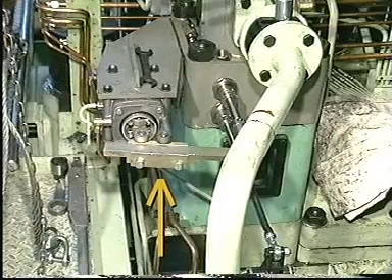The variable injection timing system comprises VIT actuators located on the fuel pumps and pneumatic components located on the control console at the side of the engine.

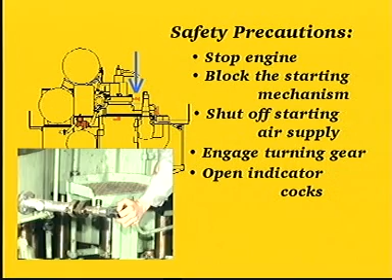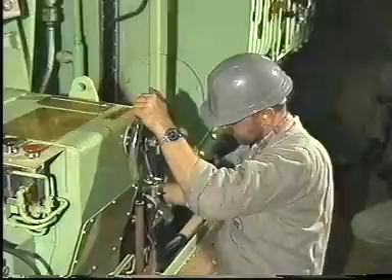Supply 7 bar control air pressure to the pneumatic components on the engine side console. Switch control from the engine room to the engine side console. Turn the regulating hand wheel until the tapered slots of the two levers are aligned.

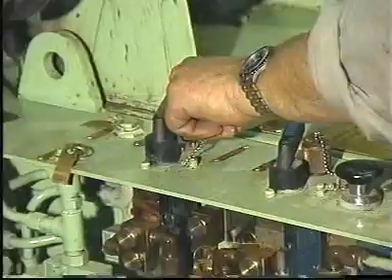The throttle non-return valve must be fully open before adjusting the VIT system. Loosen the lock nut and screw the spindle counterclockwise as far as it will go.

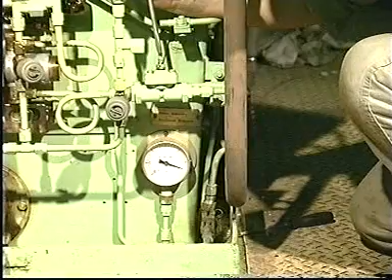Make sure that the pressurized air reaches the VIT actuator. It may be necessary to switch the changeover valve manually. The pilot valve must be adjusted so that when the spindle is pressed 8 mm inwards, the control air pressure will be 5.5 bar.

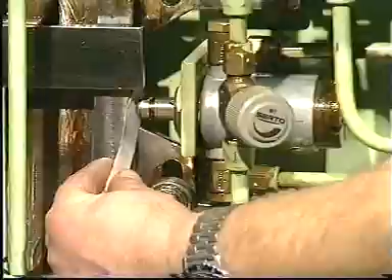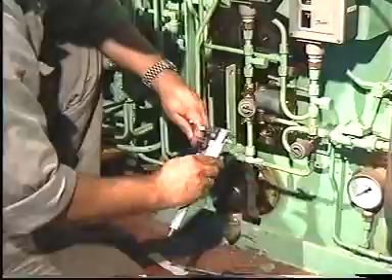Turn the regulating hand wheel so that the steel bar just touches the pilot valve. Insert a distance piece with a thickness of precisely 8 mm. If the control air pressure deviates from 5.5 bar, loosen the lock screw and turn the spring retainer cap of

the pilot valve until the pressure, which can be read on the pressure gauge on the engine side control console, reads 5.5 bar.

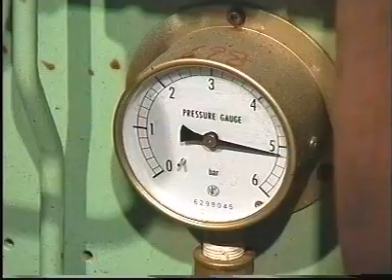Note that it will not be possible to obtain the correct pressure if the throttle non-return valve is not fully open.

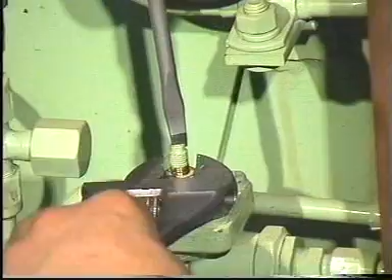Screw the spindle clockwise until a pressure drop can just be registered. Screw the spindle counterclockwise 1 revolution and lock it in this position with a lock nut. This position prevents a sudden increase in VIT index and thereby a sudden increase in the maximum combustion pressure.

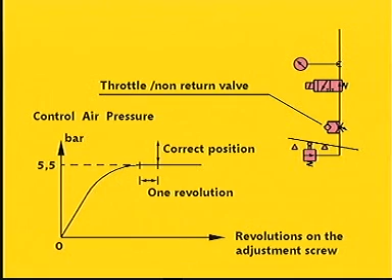Make sure that the VIT index is set at 0. Measure distance R between the two pivoting points. Note down the result.

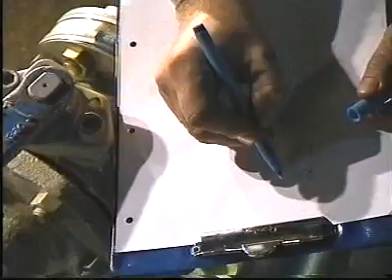Measure distance L between the pivoting point and the center line of the VIT rack. Note down the result.

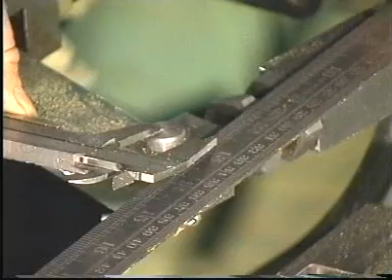In the event that R does not equal L plus X, displace the lever until new measurements confirm that R equals L plus X.

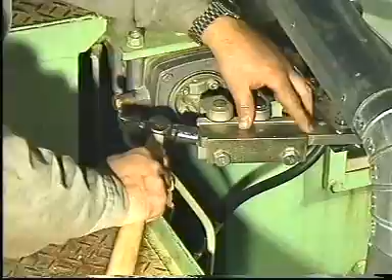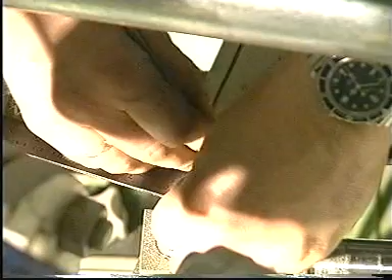When the correct position is obtained, mark the position of the lever and stamp the cylinder number on the locking plate and lever.

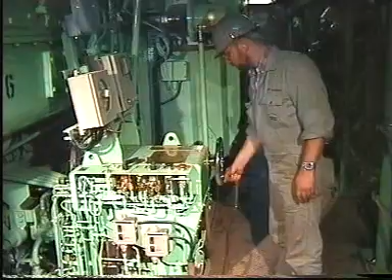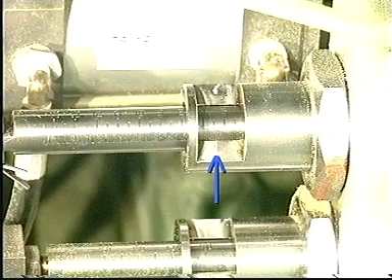Turn the regulating hand wheel until the pressure on the pressure gauge reads 2.75 bar. The VIT rack must be adjusted so that the middle index of the VIT rack can be read when a control air pressure of 2.75 bar is applied. If the actual VIT index does not correspond to the middle index, adjust the link until it does.

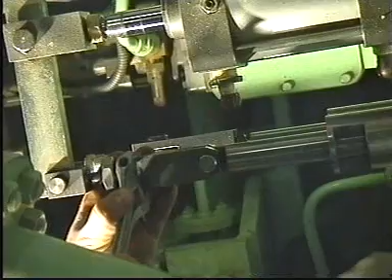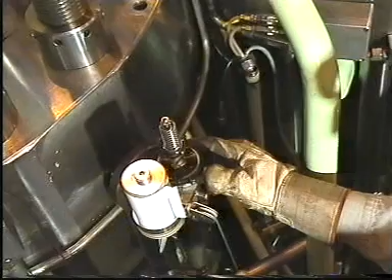Start the engine and run it up to a load corresponding to the breakpoint load. Use the indicator drive or PMI system to adjust the load until it corresponds to the breakpoint load. The mean indicated pressures of the individual cylinders must not deviate more than 0.5 bar.

If the deviation is more than 0.5 bar, adjust the load distribution on the fuel index rack of the individual cylinders. The engine is now running at the breakpoint.

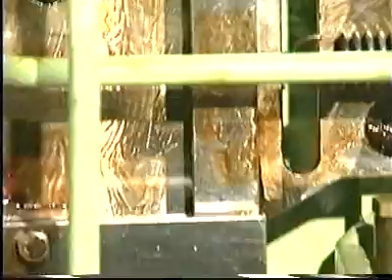At this load, the steel rod must touch both pivoting points. If the rod does not touch both pivoting points, adjust the rod in accordance with step 2.3 of this film.

Measure the maximum combustion pressures of each cylinder. Adjust the links or disconnect and lock the VIT racks so that the maximum combustion pressures, corrected to ISO ambient conditions, are uniform and have the required values.

Note down the fuel pump indexes and VIT indexes.

Run the engine up until it corresponds to 100% MCR. Use the indicator drive or PMI system to adjust the load so that it corresponds to 100% MCR. The mean indicated pressures of the individual cylinders must not deviate more than 0.5 bar.

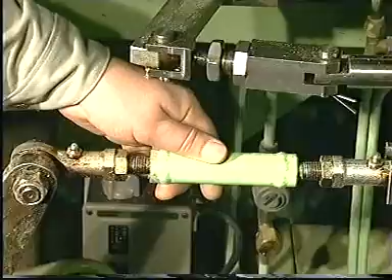If the deviation is more than 0.5 bar, adjust the load distribution on the fuel index rack of the individual cylinders.

Again, measure the maximum combustion pressures for each cylinder. Adjust the links or displace and lock the VIT racks so that the maximum combustion pressures, corrected to ISO ambient conditions, are uniform and have the required values.

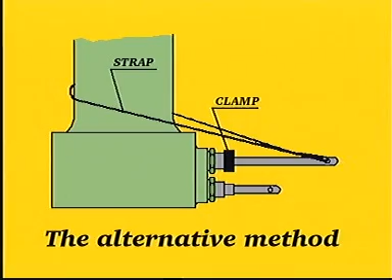Note down the fuel pump and VIT indexes.

Note down the VIT indexes at breakpoint and 100% MCR and calculate the average index. Determine the middle value of the VIT rack and calculate the difference between the middle index and the calculated average index. The result of this calculation will determine how much the cams are to be turned.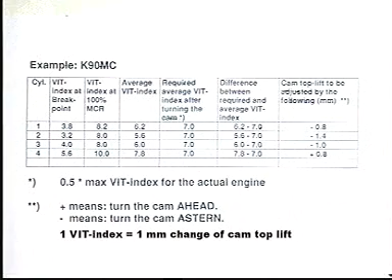If the result exceeds 0.5 millimeters, the cams must be turned according to step 1.6 of this film, after step 1.5 has been completed. The purpose of turning the cams is to distribute the breakpoint and 100% MCR service points evenly around the middle value of the VIT rack.

Note down the VIT indexes at breakpoint and at 100% MCR and calculate the difference. Add half of this difference to the middle value of the VIT rack. Subtract half of this difference from the middle value of the VIT rack.

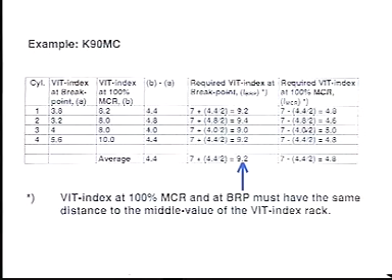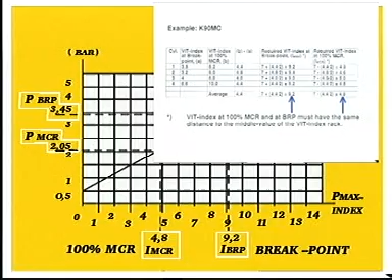Calculate the average VIT index at breakpoint and at 100% MCR. Determine the control air pressures corresponding to the average VIT index at breakpoint and at 100% MCR.

Stop the engine before making any adjustments. Make sure that control air is able to pass the changeover valve.

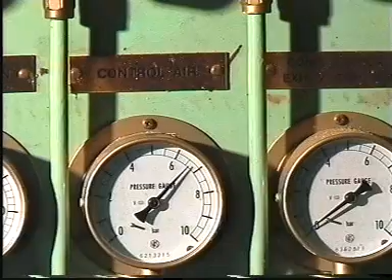Supply a control air pressure of 7 bar to the pilot valve. If the links were adjusted in step 1.4, then adjust again so that a control air pressure of 2.75 bar corresponds to the middle value of the VIT rack.

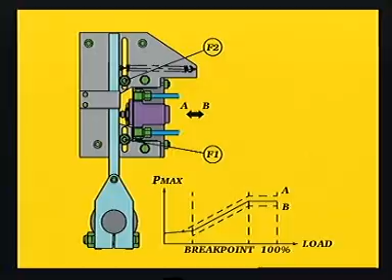Turn the fuel regulating handle to the breakpoint position. At this position, the steel rod touches both pivoting points. Displace the pilot valve bracket until the calculated control air pressure at breakpoint is obtained.

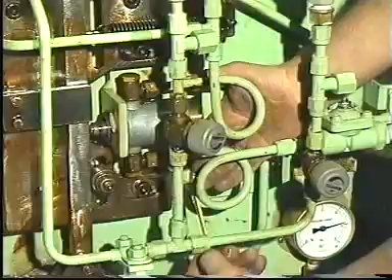Turn the fuel regulating handle to the 100% MCR position. Displace the lowermost pivoting point until the calculated control air pressure at 100% MCR is obtained.

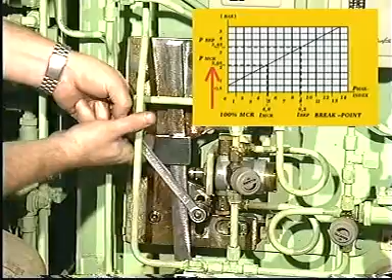Start the engine and run it up to a load corresponding to the breakpoint. Make sure that the control air pressure is able to pass the changeover valve.

Fine adjust the links so that the maximum combustion pressures, corrected to ISO ambient conditions, are uniform and have the required value. Load the engine until it corresponds to 100% MCR and fine adjust the lowermost pivoting point so that the maximum combustion pressures, corrected to ISO ambient conditions, are uniform and have the required values.

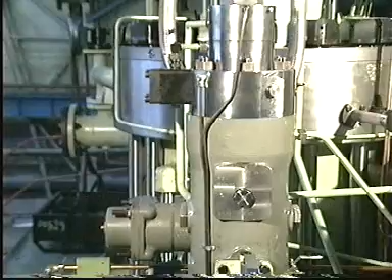Cams must be turned if the value calculated in step 1.4 of this film is exceeded.

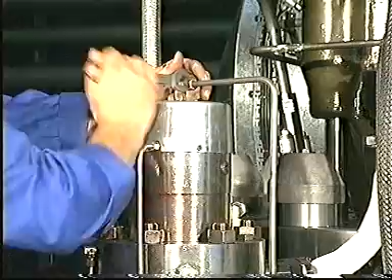The actual fuel pump lead must be determined before turning the cams. Make sure that the reversing links are in the ahead position. Disconnect the air pipe and remove the cover from the puncture valve.

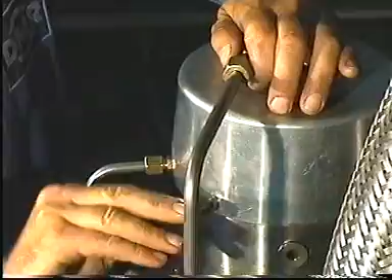Remove the plug screws to provide access for the measuring tool. Remove the puncture valve.

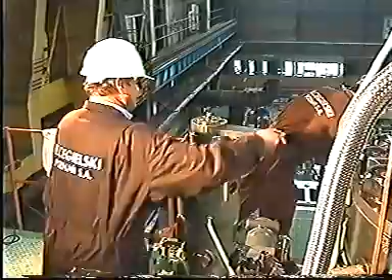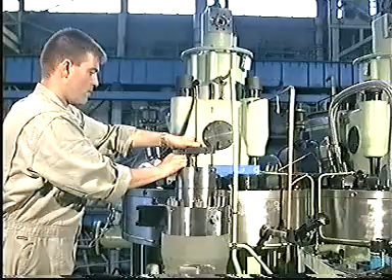Mount the measuring tool, making sure that it engages correctly with the bore in the top of the fuel pump plunger. Turn the cylinder concerned to top dead center.

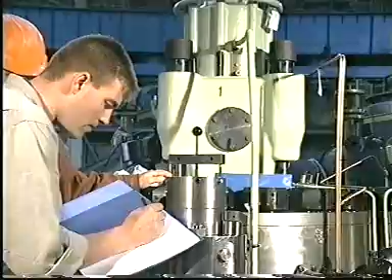Read the actual fuel pump lead directly on the measuring tool. Read the VIT index. If the VIT index is not at 0, the lead must be corrected before it is recorded in the engine logbook.

Carry out fine adjustments through the small cover. If the camshaft has been dismantled or if new cams have been mounted, adjust the cams before mounting the lower part of the camshaft housing.

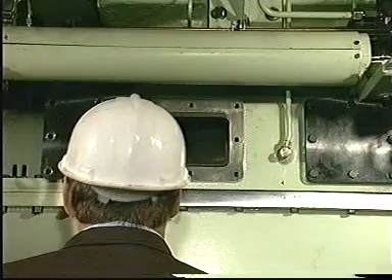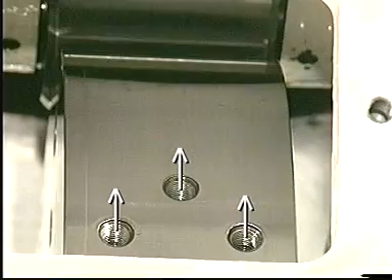Remove the plugs from the cam and insert copper gaskets. Mount, but do not tighten the snap-on couplings.

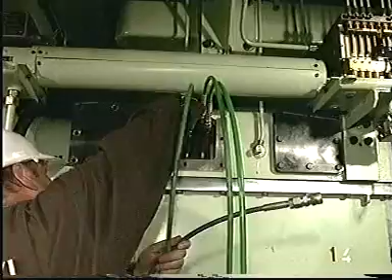Connect the snap-on couplings to the high-pressure pump and vent the system. When oil without air bubbles flows from the couplings, fully tighten the couplings.

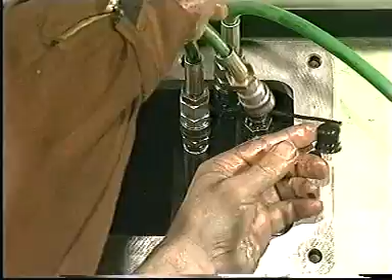Turn the engine until the special spanner can be mounted, then raise the pressure until oil seeps out between the cam and camshaft.

Read the measuring tool once again before turning the cam. Turn the cam in the required direction. See also step 1.4 of this film.

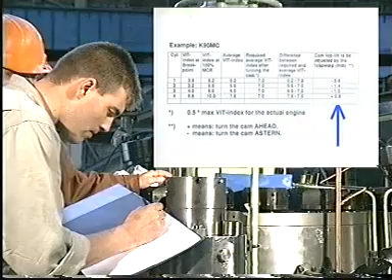Follow the turning of the cam on the measuring tool and stop turning when the required change has been obtained. Relieve the system of pressure and remove the spanner and hydraulic tools.

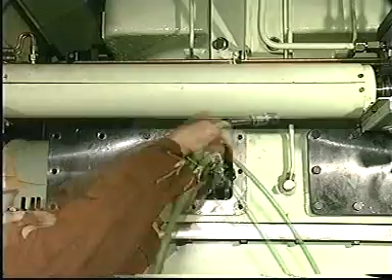Leave the cams to settle for a minimum of 15 minutes and then mount the plugs. Turn the cylinder concerned to top dead center and read the new fuel pump lead.

Read the VIT index. If the VIT index is not at 0, the lead must be corrected before it is recorded in the engine logbook. Mount the cover of the camshaft housing.

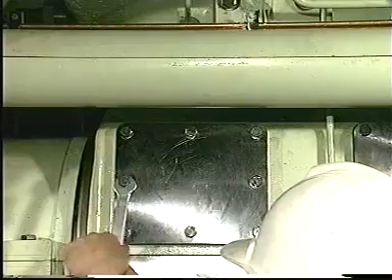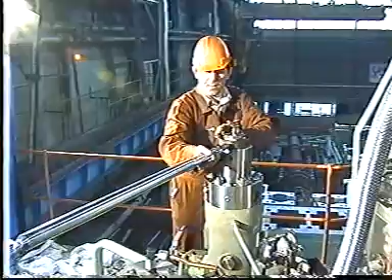Provide the puncture valve with new sealing rings and lubricate with molybdenum disulfide. Tighten the puncture valve to the torque stated in the instruction book, Volume 2, Chapter 909, and mount the plug.

Screws, cover and control air pipe. Finally, change over to normal engine control. Make sure that the VIT-system changeover valve is properly connected.

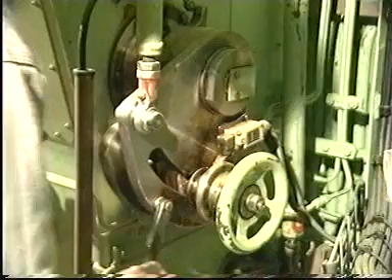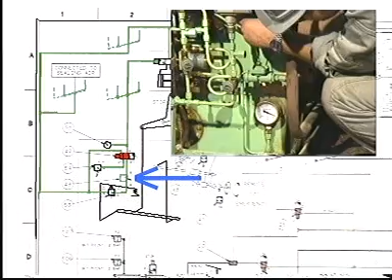The system will have to be adjusted when certain components are replaced. Regarding the throttle non-return valve, see Part 1, Step 1.1 of this film. Regarding the pilot valve, see Part 1, Step 1.1 of this film. Regarding the VIT actuators, see Part 1, Step 1.2 of this film.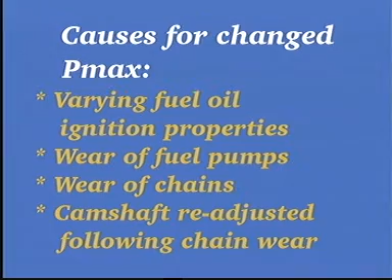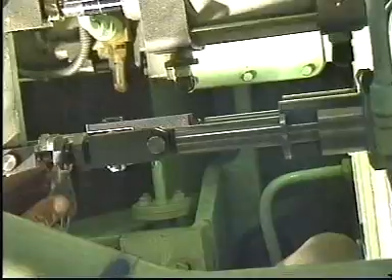Measure the maximum combustion pressures regularly, especially after bunkering new fuel oil. Adjust the individual links until the maximum combustion pressures, corrected to ISO ambient conditions, are uniform and have the required value.

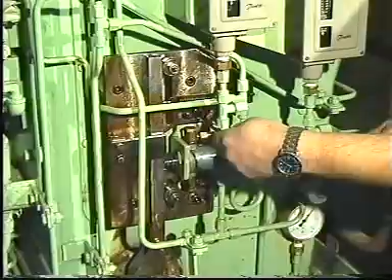If all the maximum combustion pressures are either too high or too low, displace the pilot valve bracket.

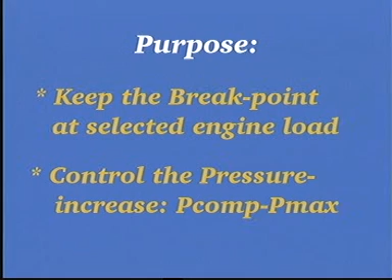The purpose of this adjustment is to keep the breakpoint at the selected engine load and to control the pressure increase. An excessive pressure increase may lead to a poor cylinder condition. In this event, contact the engine builder before making any adjustment.

Start the engine and run it up to a load corresponding to the breakpoint load, and hereafter to 100% MCR load. Use the indicator drive or PMI system to adjust the load so that it corresponds to the breakpoint load and 100% MCR load. Note down the fuel pump indexes.

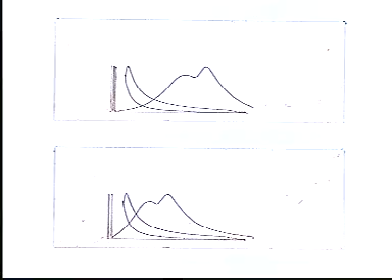The mean indicated pressure of the individual cylinders must not deviate more than 0.5 bar. If the deviation is larger than 0.5 bar, adjust the load distribution on the fuel index rack of the individual cylinders.

Switch from engine room control to control from the engine side console. Turn the fuel regulating hand wheel corresponding to the determined fuel pump index at breakpoint.

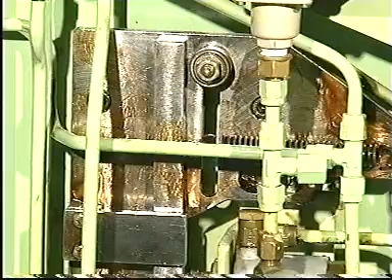If the steel rod does not touch both pivoting points, loosen it from the shaft and turn it to the correct position.

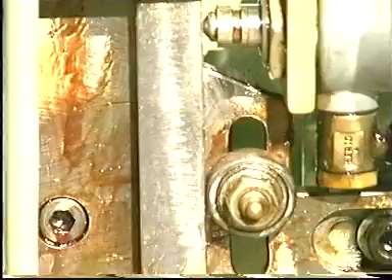Start the engine and run it up to a load corresponding to the breakpoint load. Make sure that the steel rod touches both pivoting points.

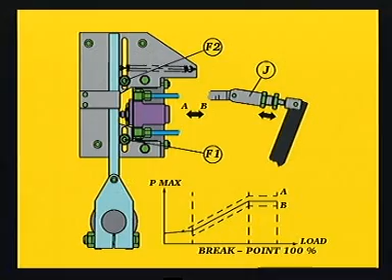Adjust the links until all maximum combustion pressures are uniform, and then displace the pilot valve bracket until the average combustion pressure, corrected to ISO ambient conditions, is at the required value.

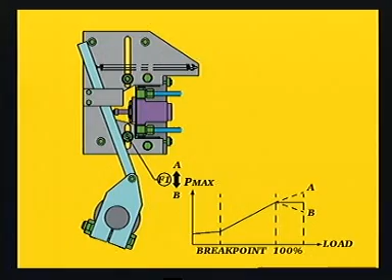Load the engine so that it corresponds to 100% MCR load and displace the lowermost pivoting point until the average combustion pressure, corrected to ISO ambient conditions, is at the required value.

Decrease the load until it corresponds to 40 to 50% MCR load and displace the uppermost pivoting point until the VIT racks just start to move inwards.

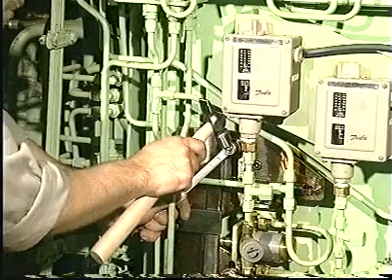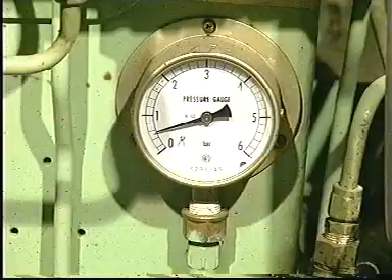This occurs at a control air pressure of about 0.5 bar. Lock the pivoting point in this position and change over to normal engine control.